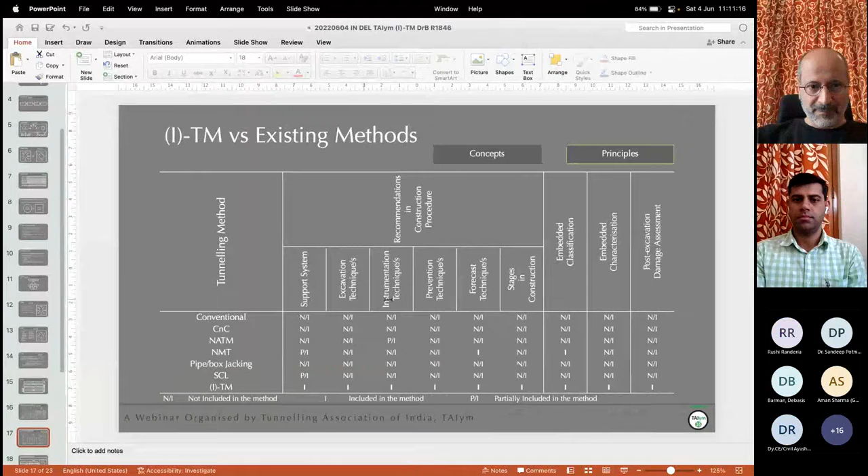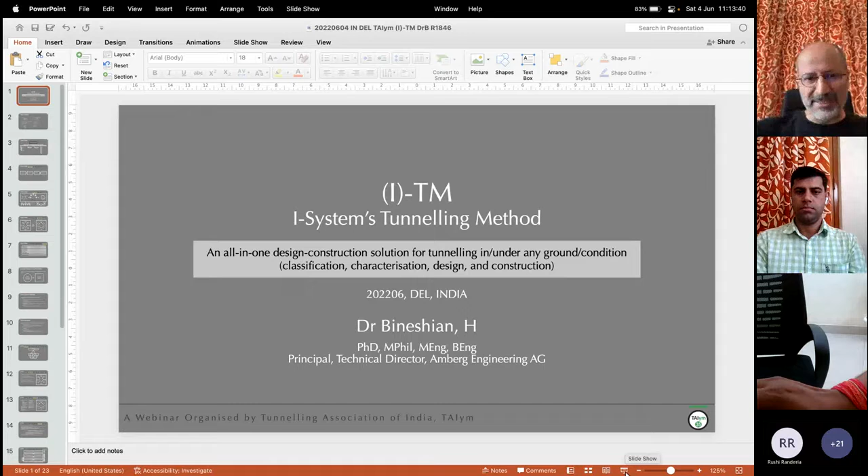This lecture is about I-TM, I-Systems tunneling method, an all-in-one design construction solution for tunneling in or under any ground or condition. A tunneling method which includes classification, characterization, design approach, and construction advices. Today's lecture contains the tunnel design, including the design approach, I-System, I-TM, and design procedure.

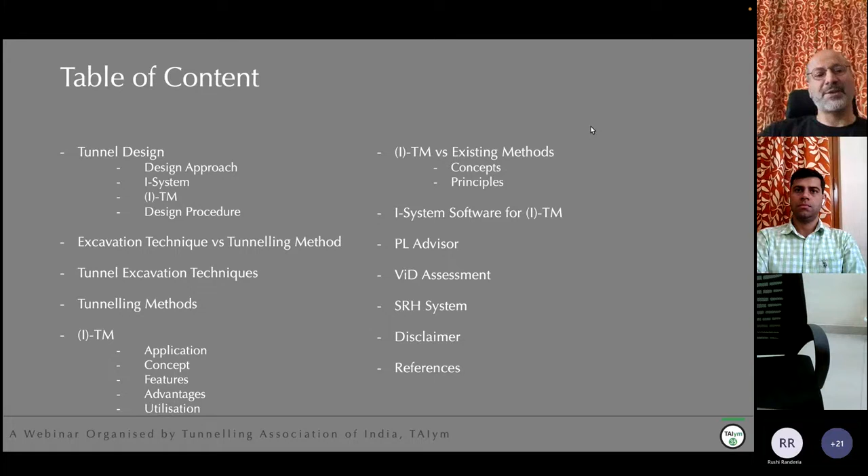Today also I will compare the excavation techniques with the tunneling methods to highlight more the difference between these two, which unfortunately are used interchangeably by mistake by tunnelers. I will go into details for the tunnel excavation techniques as well as the tunneling methods. Then I will enter the discussion about the ITM. I will explain the application of ITM, concept behind the ITM, features of ITM, advantages of ITM, and utilization of ITM.

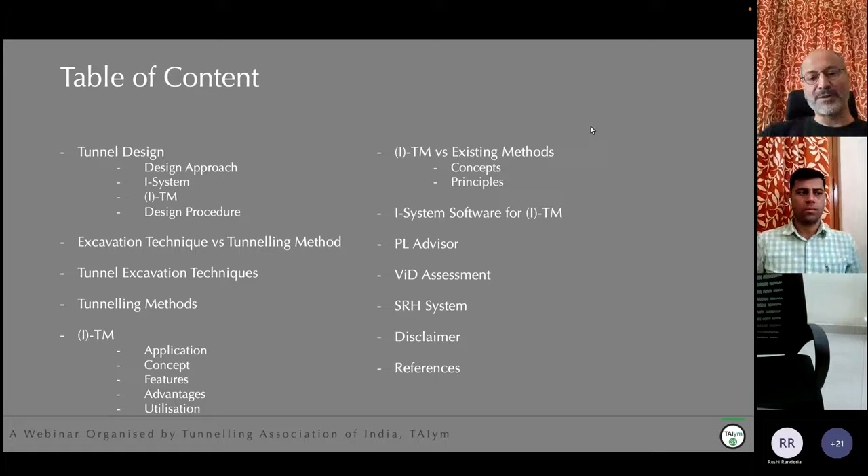ITM will be compared with the existing tunneling methods, considering the concepts and the principles. I will explain very little about the iSystems software that can be used in ITM. Also, I will have a brief explanation about the pull length advisor, vibration-induced damage assessment, the stress release hole system, and finally the disclaimer and references.

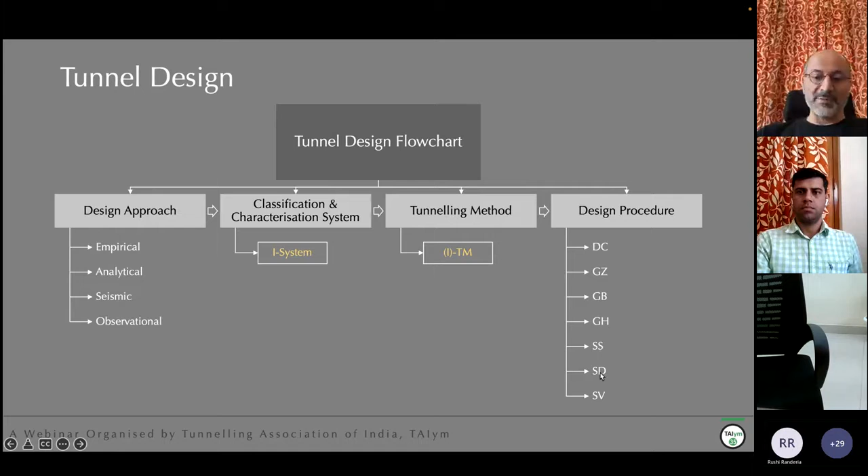Another most important part of the tunnel design flowchart is the classification and characterization system, where in this case we will be using only iSystem. Then is the tunneling method, where we are focusing on ITM. And finally the design procedure, including the data collection, ground zoning, ground behavior, diagnosis of the ground hazards, determination of the support systems, structural dimensioning, and finally structural verification.

Let's go a little bit more into the details. Design approach in tunnel design. It includes 4 steps. Empirical part, which is the design practicality, usually defined by the classification system. Analytical part, which is the design core, where we do the structural dimensioning as well as the structural verification. Seismic part, which is the dynamic design part for the design of the tunnel.

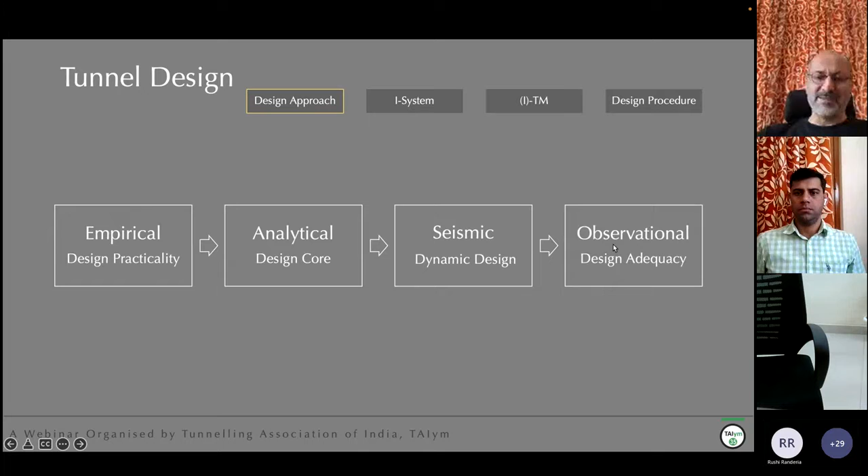It is very important also to consider the seismic effect in our structure. And finally, the observational part, which is the design adequacy. It is design as you go during the construction.

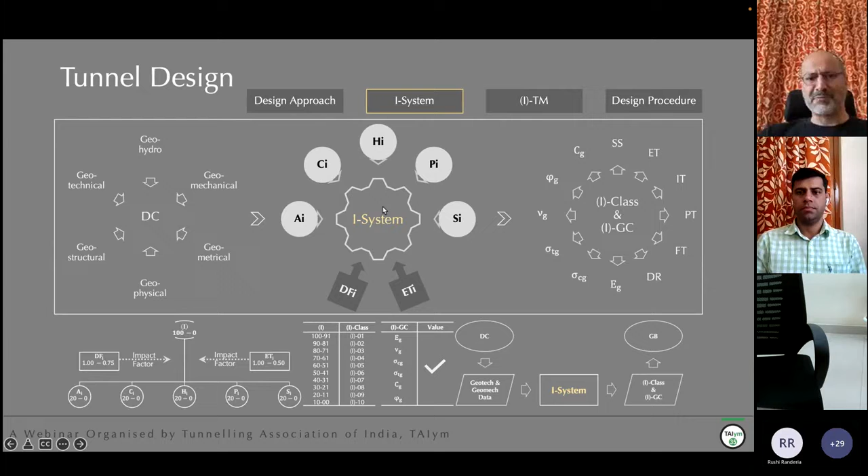In the tunnel design, the second part was the iSystem. What is iSystem? Today's lecture is about ITM, and ITM is the tunneling method of iSystem. But let me just briefly explain in one slide what is iSystem. Then if there was interest on that, in another webinar, I can present the iSystem comprehensively.

iSystem has an engine including 5 indices and 2 impact factors. To be able to run this engine, we need to do the data collection first, DC, including the geohydrological data, geomechanical data, geometrical data, geophysical data, geostructural data, and geotechnical data. All of this information is obtained from the face of the tunnel; in this case, we are talking about iSystem for tunneling. iSystem is applicable for any underground spaces, semi-underground spaces, as well as the surface structures. But here, I'm focusing on underground parts.

So when data collection is done, it would be entered to this system, and then these 5 indices, including the armature index, configuration index, hydro index, properties index, and strength index will be calculated. As you see, each of the indices has a 20% share out of 100. The score is between 0 to 20. When it is calculated, two impact factors, one is the dynamic force impact, another one is the excavation technique impact, will be impacting the total value gained from the summation of these 5 scores. And finally, I, which is the I system value, will be calculated, which is between 0 to 100.

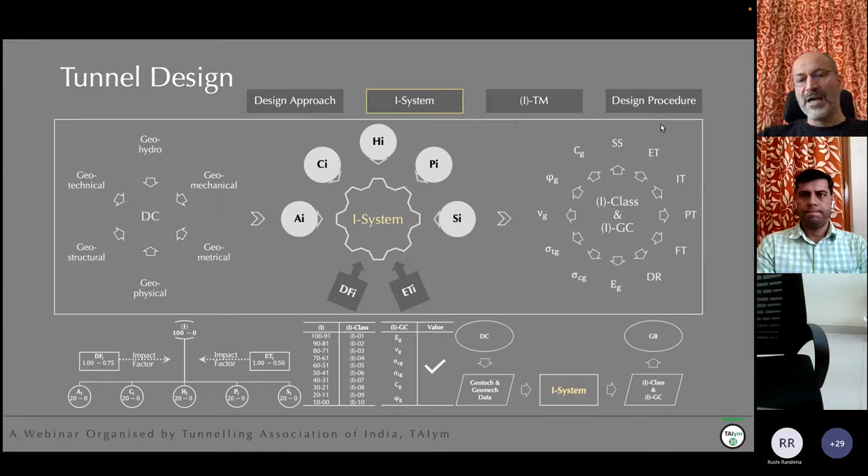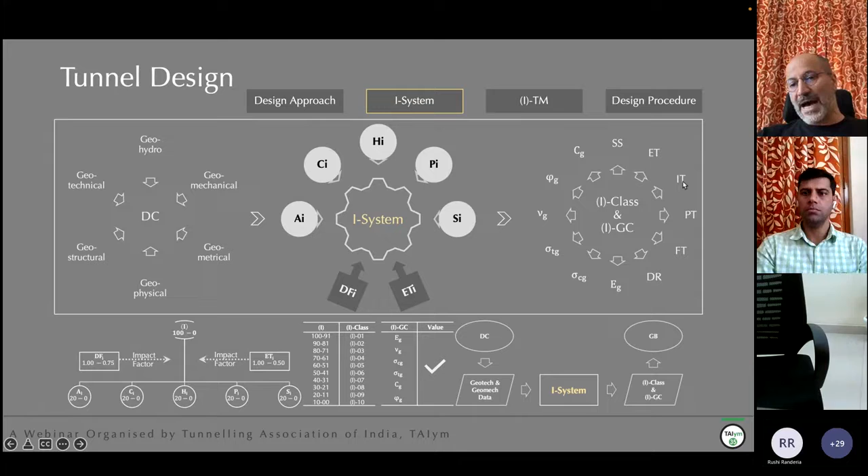Then IT, which is the instrumentation technique, it would be giving you advice how to monitor your underground space. Next one is the PT, which is the prevention technique. It would assist you how to prevent collapses and failures or incidents in your tunnel. Then FT, which is the forecast technique. It would be giving you advice on how to predict the ground ahead of your face. We can't drive in the tunnel with lights switched off. We need to predict the ground and move ahead in the tunneling. And the last recommendation from the I class as output of I system is the design remarks. It would tell you what should be your philosophy to design this tunnel.

Another part of output of I system is the IGC. IGC is the I system's ground characterization. It also includes 6 outputs that are shown here. Modulus of deformation of ground, unconfined compressive strength of ground, uniaxial tensile strength of ground, Poisson's ratio of ground, internal friction angle of ground, and cohesion of ground. These parameters are also the output of I system as I system's ground characterization. With these parameters, you would be able to design the structure or review your design.

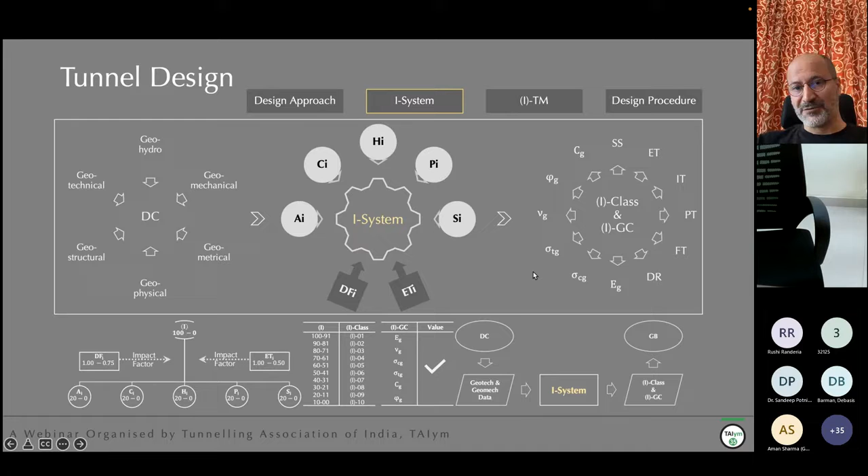Now, based on this I class and IGC that we obtained, as you remember, we collected the data, DC, which included the geotechnical and geomechanical data. Then we entered it in the I system engine and we calculated the I system. Output was I class and IGC. Based on these 12 parameters, you would be able to predict the ground behavior, as an additional feature to all of those parameters that are given to you as output of I system.

Now, let's get back to ITM. ITM is the I system's tunneling method. In a simple word, ITM is the underground part of I system. So it is called ITM. It has very important assumptions that are mentioned here, and very important principles that I would explain when I enter particularly into the ITM discussion.

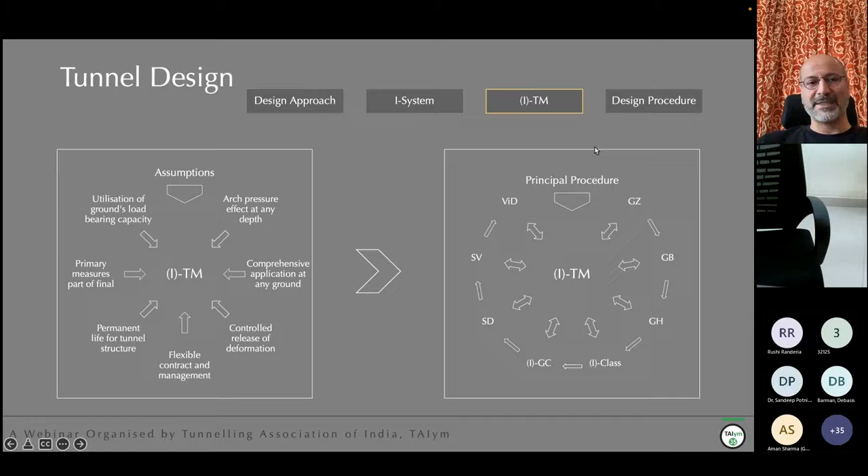Finally, in the tunnel design, we enter the design procedure. Design procedure includes 7 stages. Again, DC, which was the first step, which is already done because you were going to calculate the I system. DC is the data collection. It is the required data for I system and design.

Next stage is the GZ, which is the ground zoning. If we have 3 kilometers, 10 kilometers, X kilometers of tunnel that we are going to design, we need to divide this entire length into particular zones with similar properties and design the tunnel for those particular zones. For example, if finally we divided a 12 kilometer tunnel into 6 zones, we need to give 6 designs. This means that each zone would have its own design. It is a function of ground properties. The I system will assist you to do the GZ also.

Then is the ground behavior. In the previous slide, I said how it can be derived from the I system. It is based on the mechanical responses between the ground and the structure you want to make. In this case, the structure is the tunnel. It can be an underground station. It can be a semi-surface structure.

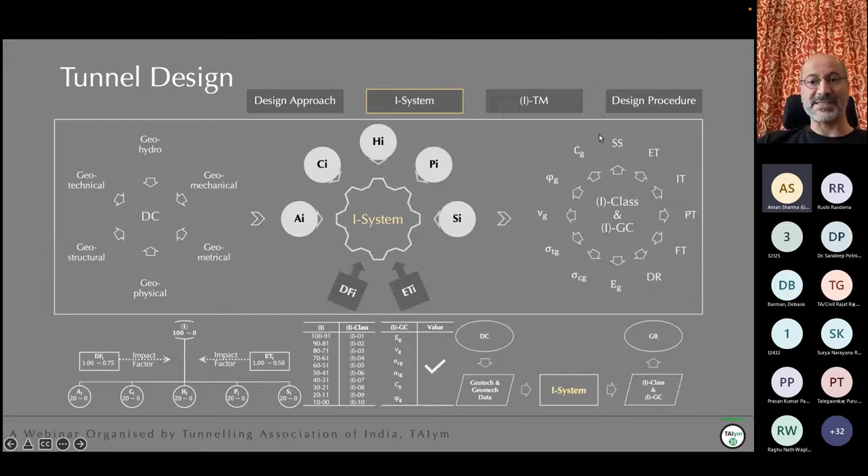Next stage after ground hazard diagnosis is the support system determination. Again, it would be determined by the I system. The I system, as I explained here, would tell you which type of support system you need to go ahead with. So the support system would be defined and determined by the I system. It is based on the I system for each ground behavior and associated ground hazard.

The next one is the structural dimensioning. It would be done partially by the I system and partially by analytical methods to dimension the structure. It is the design analytical calculation. And finally, you need to verify your design, which is the SV, structural verification: relative safety margin definition for each individual structural dimensioning that you have already done.

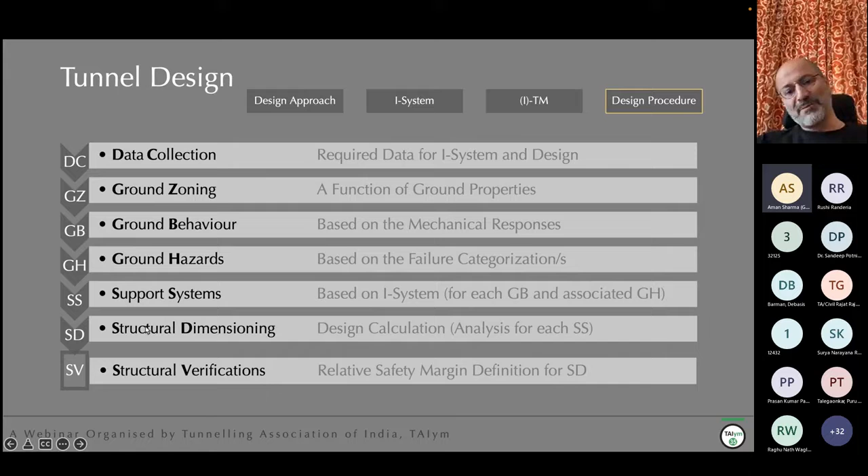Now let's go a little bit further into tunneling. You may interchangeably use excavation technique and tunneling methods, and you see experts also sometimes using them interchangeably, but it is not right. Tunnel excavation techniques are employed in tunneling methods as an important element. It's not the tunneling method. It is one important element of tunneling methods. So my request to all of you attending this session is to please differentiate between tunnel excavation techniques and tunneling methods.

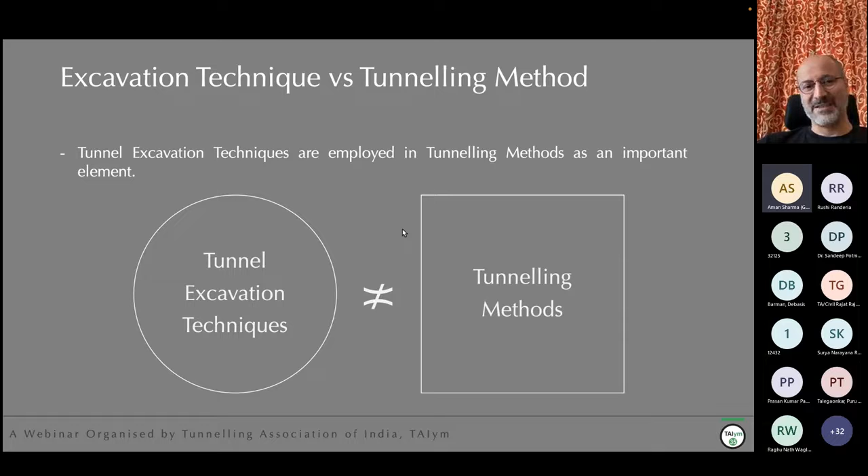The reason I am emphasizing this is that it would lead to misunderstanding of tunneling, misunderstanding of ground behavior, and the result would be huge mistakes during construction or before construction in the design and pre-design phases. So let's go into the details of tunnel excavation techniques. Then you yourself will get the differences. Techniques are employed in tunneling methods for excavation purposes only. It is only and only for excavation. But different types of excavation methods can be utilized in different tunneling methods.

Number one of the tunnel excavation techniques is manual, or MAN. It is applicable for small to large scale excavations without use of explosives. Examples are partial sequential digging, partial sequential excavation.

May I request the microphone to be switched off?

So for the manual techniques of excavation: partial sequential digging technique, partial sequential excavation technique, sequential excavation methods. It is an American method. Unfortunately, many people call it a tunneling method. It's not a tunneling method. It is only a sequential excavation method, usually used for full face excavations. The manual excavation techniques can be used for heading and benching or for full face excavation.

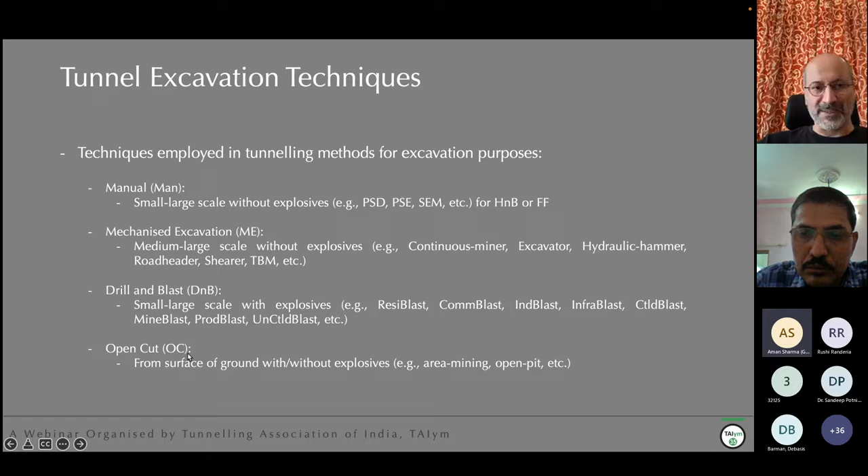Now let's explain the tunneling methods: methods employed in design, construction, and maintenance of underground spaces. Three important words are used in the definition of tunneling method: design, construction, and maintenance. You may raise a question in your mind: why maintenance? Why design? Usually you have heard about tunneling methods for construction. But from now, put this question in your mind, and I hope that you will get the answer at the end of this lecture.

So, tunneling methods are the methods employed in design, construction, and maintenance of underground spaces, including the tunnels. Two types of categorizations I can present here for tunneling methods. One, medium-based, another one, concept-based. Medium-based tunneling methods are based on the medium in which

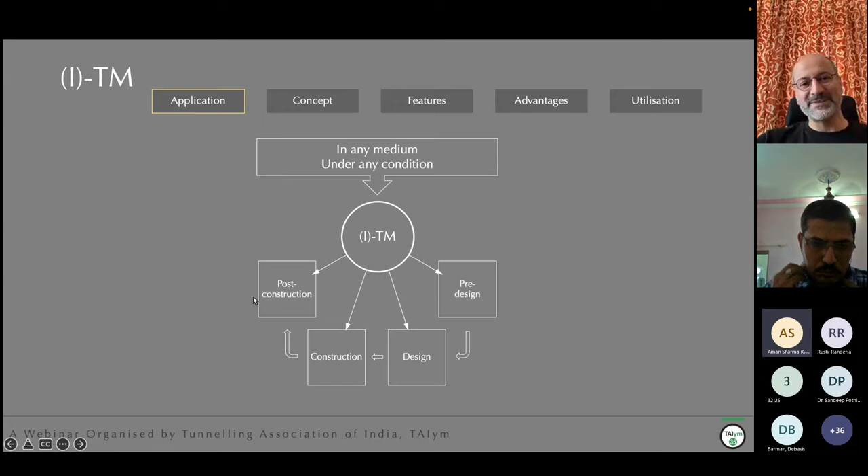So now you know the difference between the tunneling methods. Maybe you knew that before, but I tried here to clarify the difference between the tunneling method and excavation technique. Now is the time to go a little bit further into the details of I-TM.

For your information, if you have more interest in I-TM, there is a published paper which is available. I can provide it to the organizer. It is about I-TM, and you can go into the details of I-TM there. I will try to give the most important information on I-TM in this lecture.

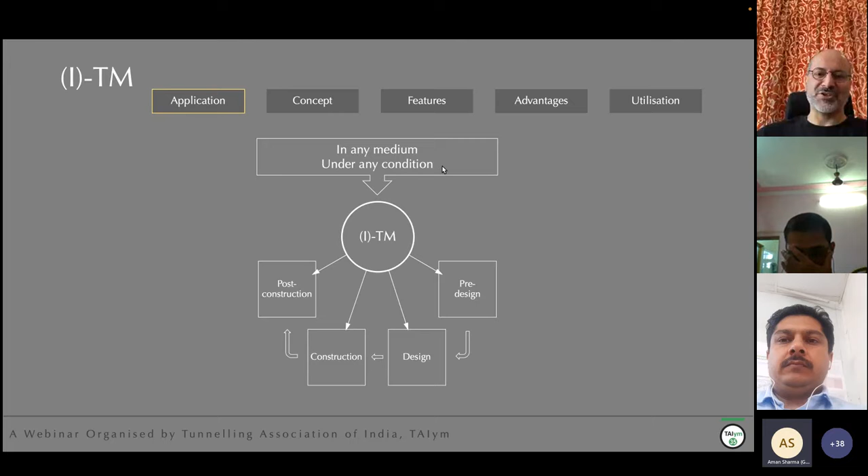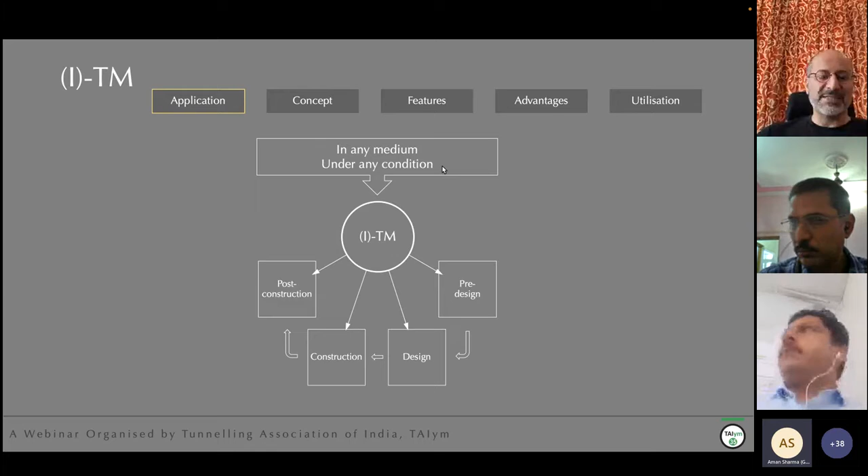Let's see what is the application of I-TM. It is designed to be applicable in any medium, meaning rock, soil, underwater. And it is designed to be applicable under any condition, any special condition of ground.

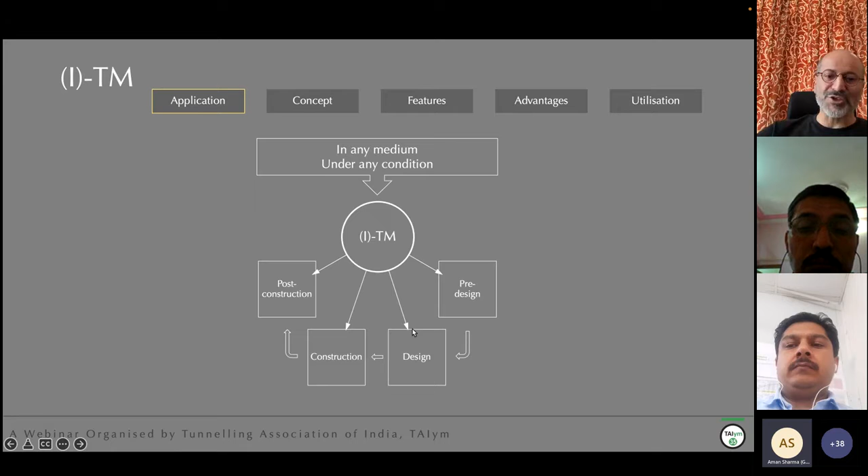So this is I-TM, and it can be used in pre-design phase, design phase, construction phase, post-construction phase, and maintenance. It considers all three aspects: design, construction, and maintenance.

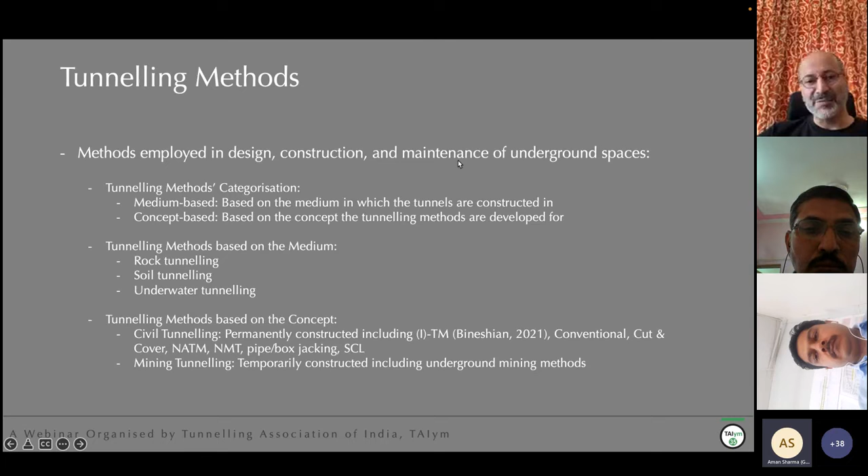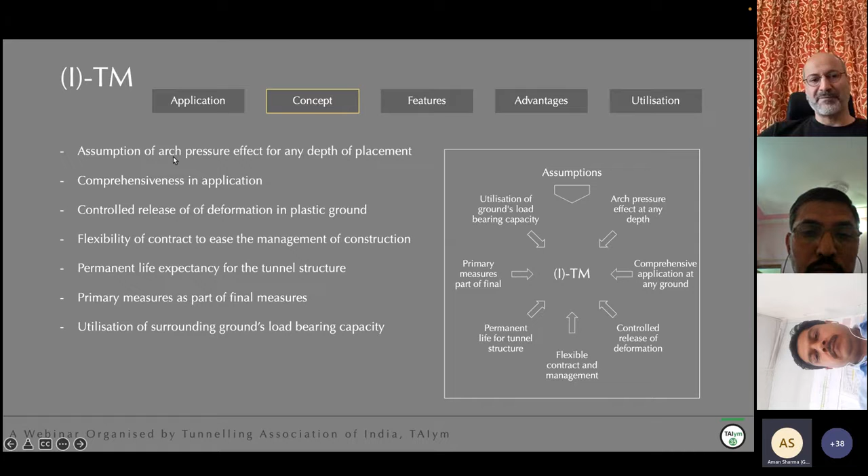What is the I-TM concept based on? It has some assumptions that I would explain one by one. In I-TM, arch pressure effects at any depth of placement of the tunnel will be considered importantly.

We are not neglecting the depth, and we are not neglecting the arch effects. So you are not required, when using I-TM, to classify the tunnel based on depth into shallow and deep. Based on any depth, arch pressure is considered.

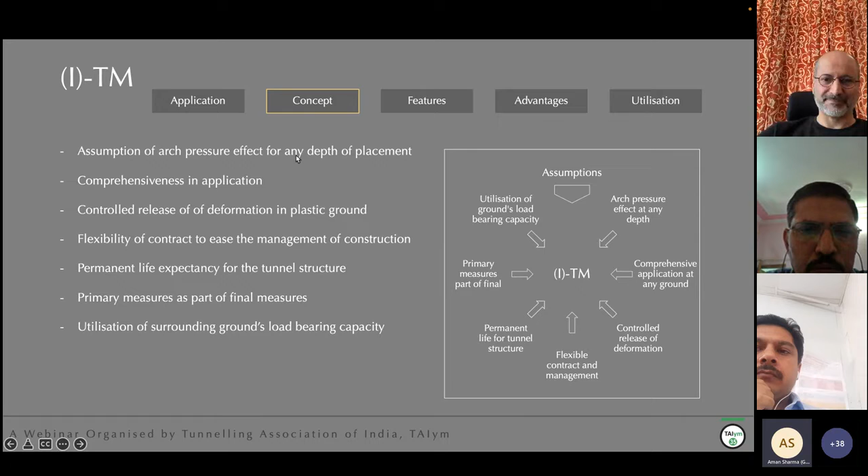Another assumption or concept is that it is comprehensively applicable in any medium, in any condition, under any condition.

The next concept is that it would allow the structure of the tunnel to release the stresses, to release the deformation, in a controlled manner in plastic condition.

It gives you flexibility of contract to ease the management of construction. I have worked in four continents, and I have observed the challenges involved in tunneling methods. Unfortunately, in any of the existing methods, sometimes your hand as designer is tied, because it is not included in the BOQ, in the contract.

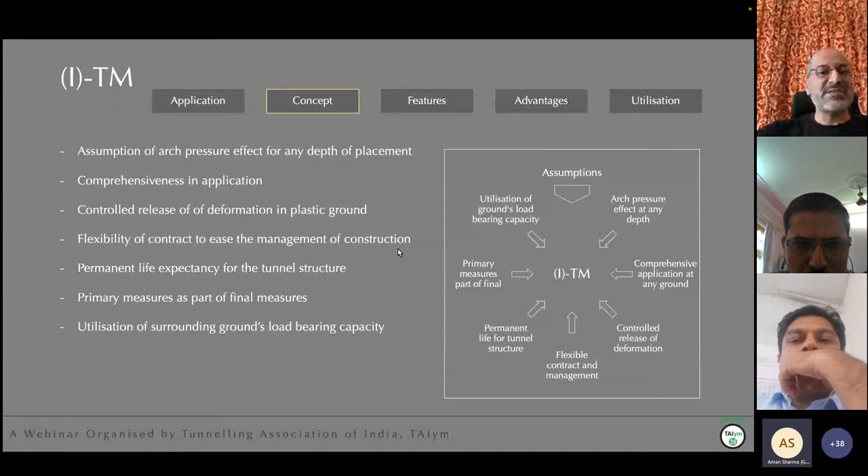ITM resolves this by giving you a comprehensive range in the contract, so that flexibility of contract would be given to the clients. So you, as the geologist, as the engineer, as the tunneler, as the designer of the tunnel, would not be facing such issues.

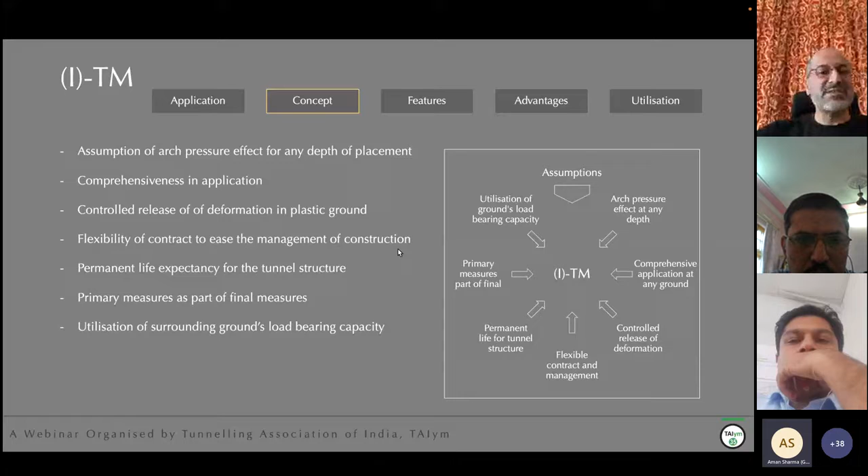Another important concept in ITM is life expectancy of the structure. It is based on permanent life expectancy for the tunnel structure.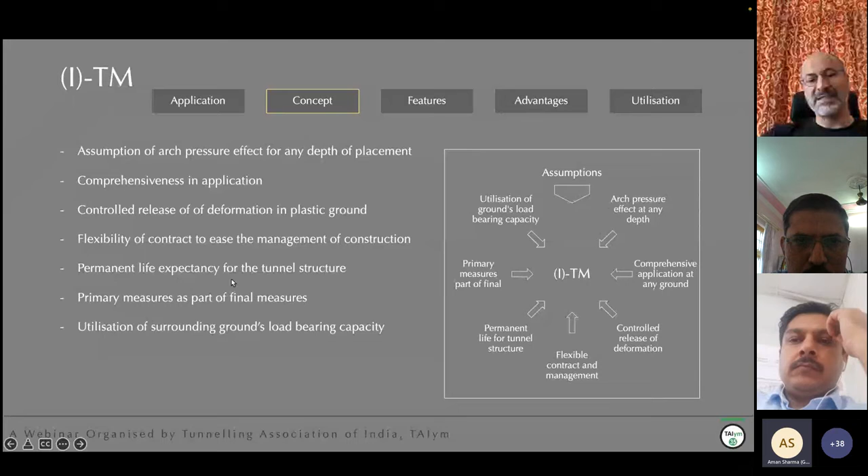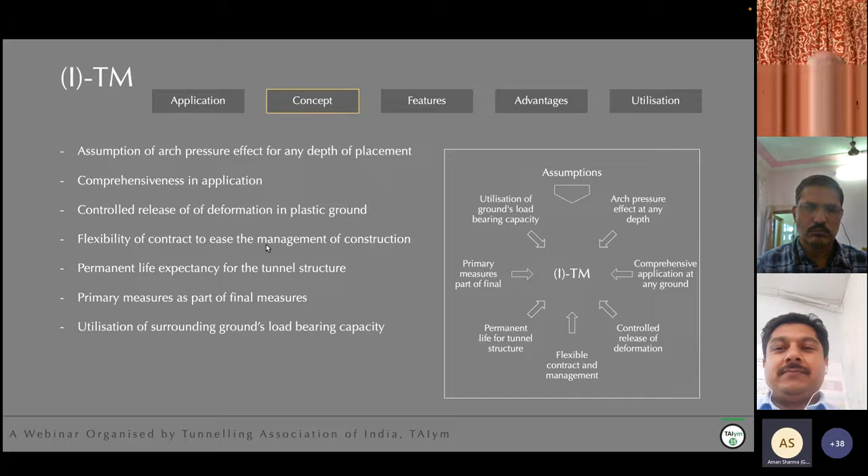ITM is developed to save in cost and time as well. You are not required anymore to neglect the primary measures in your design for final measures. It means that primary measures are part of final measures in ITM.

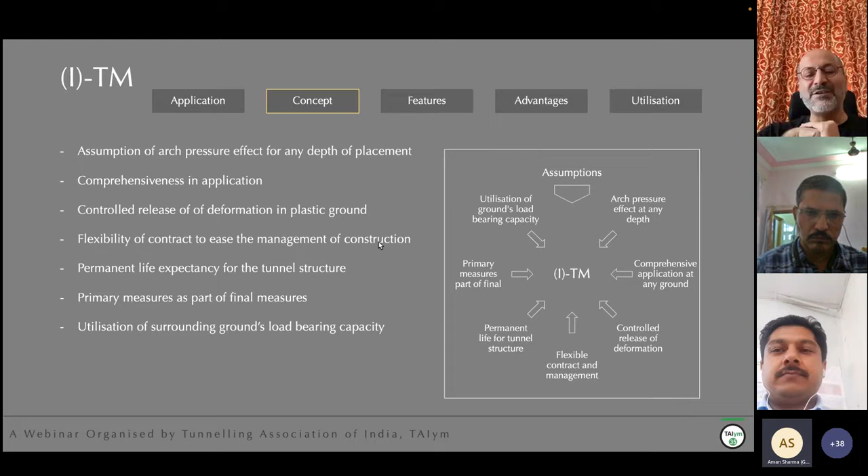And the last concept is the utilization of the surrounding ground's load-bearing capacity. It utilizes the load-bearing capacity of ground, because ground is better than any structure you put manually to take the load. It gives you the active and activation concept of stresses in the surrounding ground.

It tells you to design the structure in a way that the ground itself cooperates in load bearing. Give a measure to improve the load-bearing capacity of ground. Don't design passive structures.

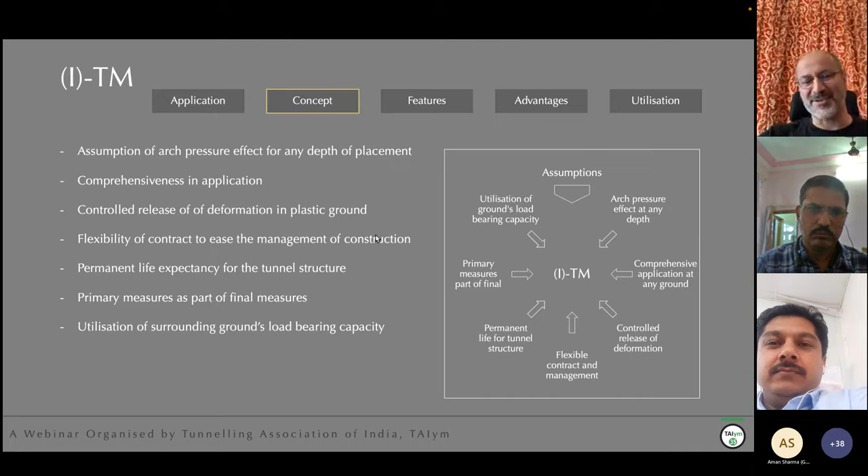What are the features of ITM? I have listed it and demonstrated on the right-hand side. Use of I-system in the design procedure. When you are using ITM, it has embedded classification in it, very simple. It would assist you in derivation of I-class, which is the I-systems classification.

Derivation of IGC, which is I-systems ground characterization, gives you the most important mechanical properties of ground for analytical calculations. It helps you determine the ground zoning in your design, identifying ground behavior, and diagnosing the ground hazard associated with each ground behavior. It determines the support system for you, assists in structural dimensioning, and helps you in structural verification.

Another feature of ITM is the employment of I-system in construction for pre-excavation evaluation, applying I-class and IGC. Another feature is the employment of post-excavation damage assessment tools.

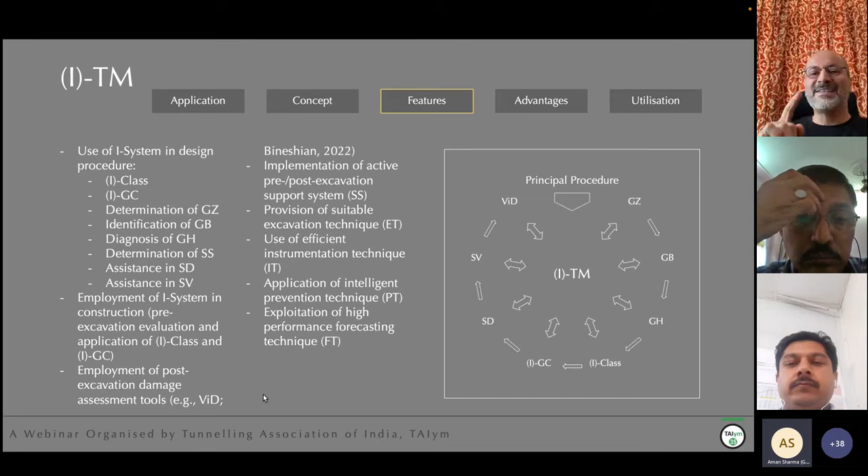ITM gives you the opportunity to assess the damages you are applying to the underground structure during the excavation. It is called vibration-induced damage. The related paper is also available.

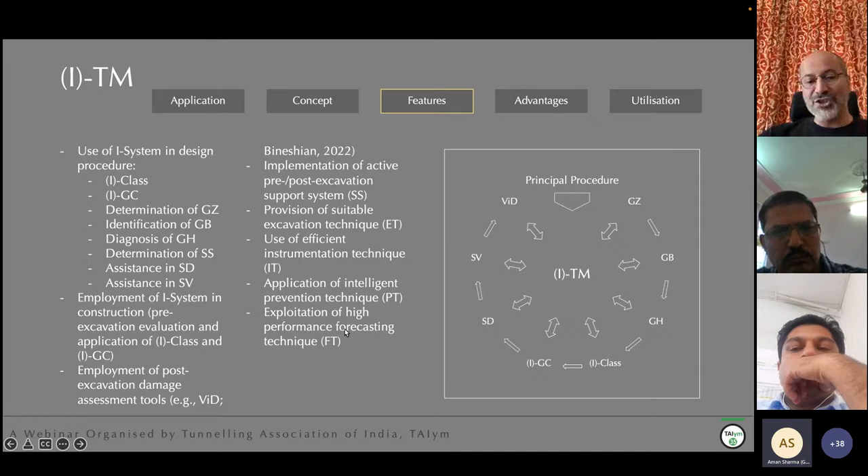Another feature of ITM is implementation of active pre- or post-excavation support system, provision of suitable excavation techniques, use of efficient instrumentation techniques, application of intelligent prevention technique against any failure or collapses or surprising incidents, and exploitation of high performance forecasting techniques, to have insight into what is going on ahead of your faces in your tunnels.

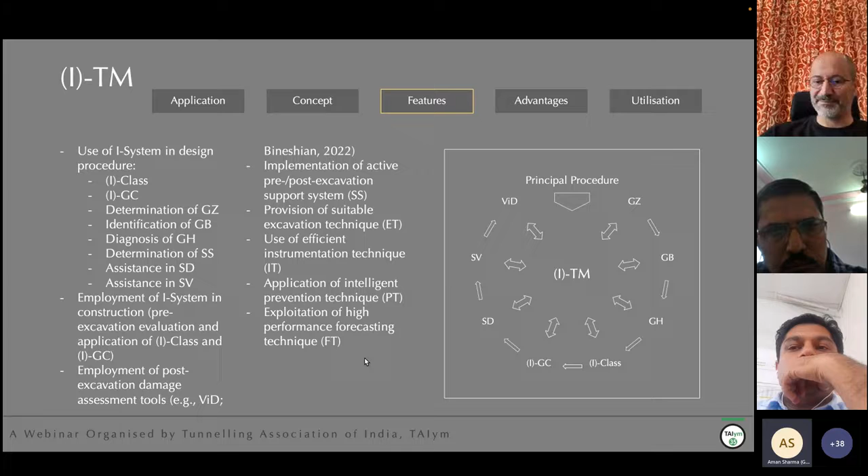What is the advantage of ITM? When I was explaining about the application, the concept, and the features of ITM, most probably you have already got the advantages. I would like here to summarize them.

Applicability in any media, rock, soil, underwater. Feasibility and practicality under any ground condition, covering varieties of ground behavior and hazards, safety and optimality in design and construction, cost efficiency, consideration of the primary measures as part of final measures, uniformity in utilization, embedded classification and characterization system of I-system, I-class, IGC, provision for pre-excavation evaluation, embedded I-system and GCD.

GCD is ground conductivity designation.

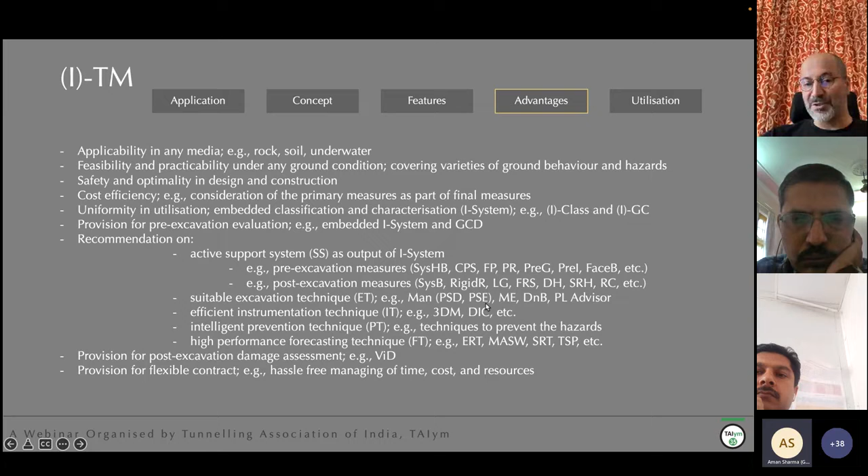Suitable excavation technique, ET, including manual, PSD or PSE, partial sequential digging or partial sequential excavation, mechanized excavation, drill and blast, pull length calculation, and efficient instrumentation technique, IT, including 3D monitoring, digital image correlation, or other techniques as proposed by I-system.

Intelligent prevention technique, PT, for example, techniques to prevent the hazards. High performance forecasting techniques, including electrical resistivity tomography,

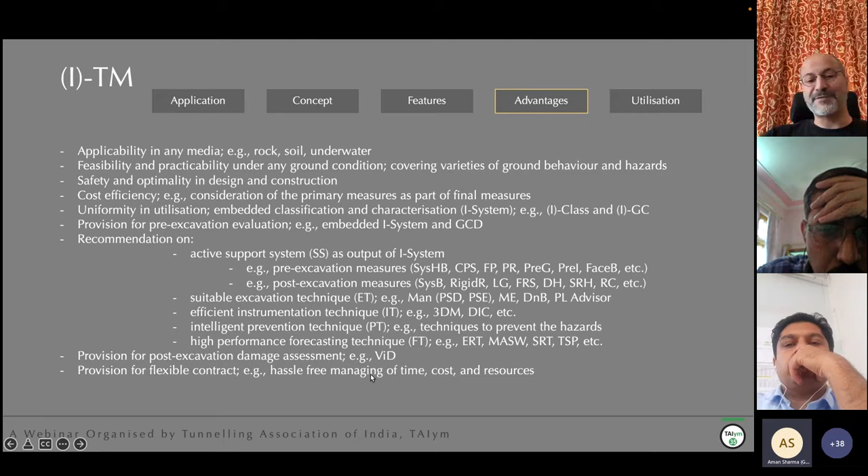ERT, MASW or multi-channel analysis of surface waves, SRT which is the seismic refraction tomography, and TSP, which is the tunnel seismic prediction, provision for post-excavation damage assessment VID, and provision for flexible contract, hassle-free managing of time, cost, and resources.

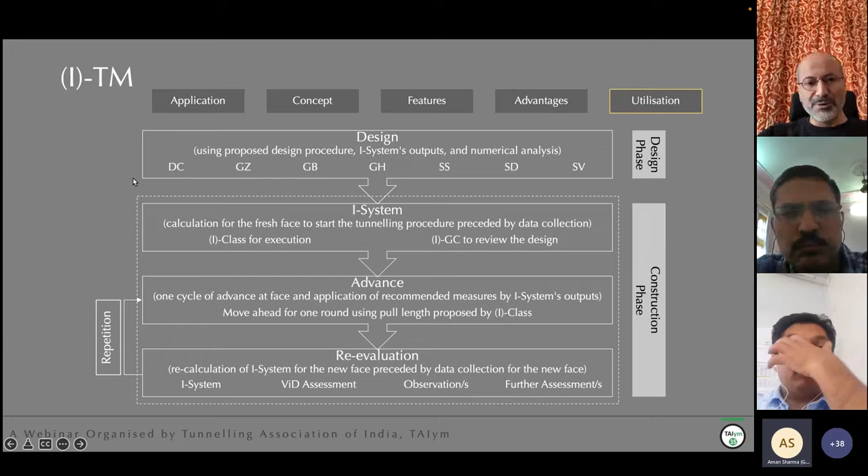How to utilize it? How to utilize ITM? I tried to explain it in this slide for design phase as well as the construction phase.

In the design phase, you will be doing the data collection, putting it in the I system, making the ground zoning, deriving the ground behavior, identifying the ground hazards, determining the SS, and helping in SD. All of these stages from DC to SD is by I system, and then it helps in structural verification.

This is the use of ITM in the design phase. And now, how to use it in construction phase. I know this question was in your mind, how to use it. Now we have designed the tunnel. How to go ahead? Simple.

You just calculate the I system for the fresh face. Even at the portal, when you want to start the tunnel, you just calculate the I system. It will give you the I class and the IGC. Based on the I class, recommendations are given for the support system, the excavation technique, the instrumentation technique, for prevention of failure, and for forecasting. Advance, start the excavation. Advance, advance your tunnel.

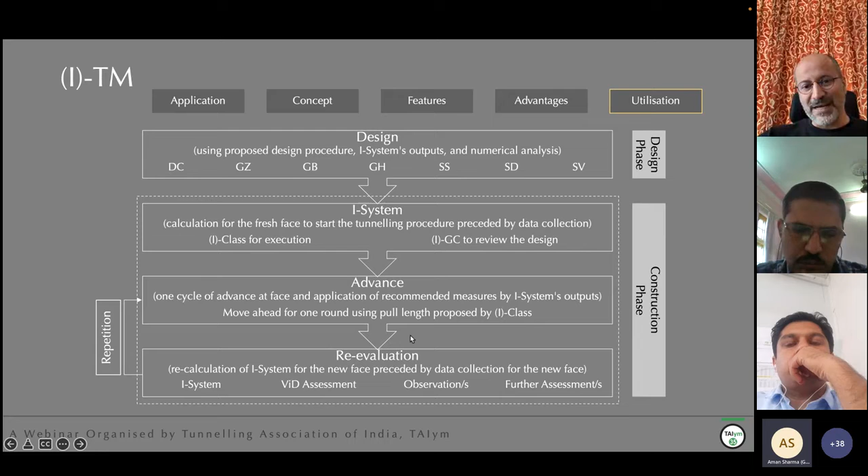And based on the IGC, review your design. That means, for example, advance the tunnel for 3 meters, now you reevaluate it, reevaluate your ground condition, again using I system. Now, as you have done the blasting, or employed any excavation method, you also calculate the VID, assess how much damage you have applied, check your observations, and finally do your judgment.

Repeat this procedure: advance, apply I system, advance, apply I system, and go ahead until your tunnel is broken through.

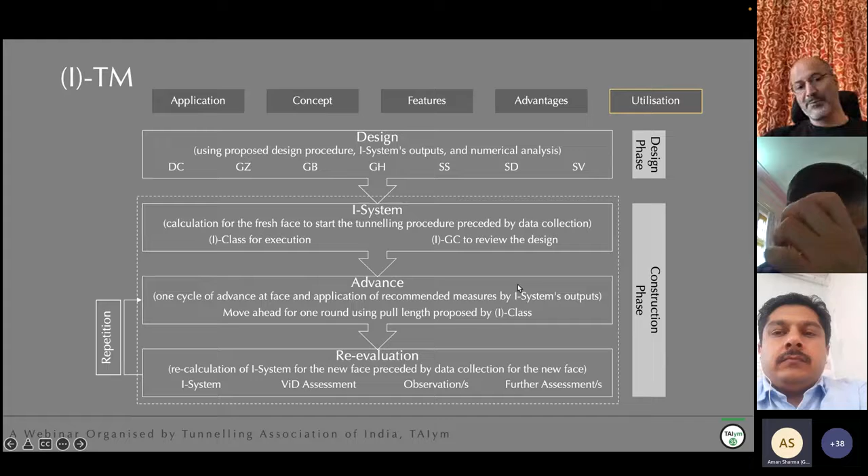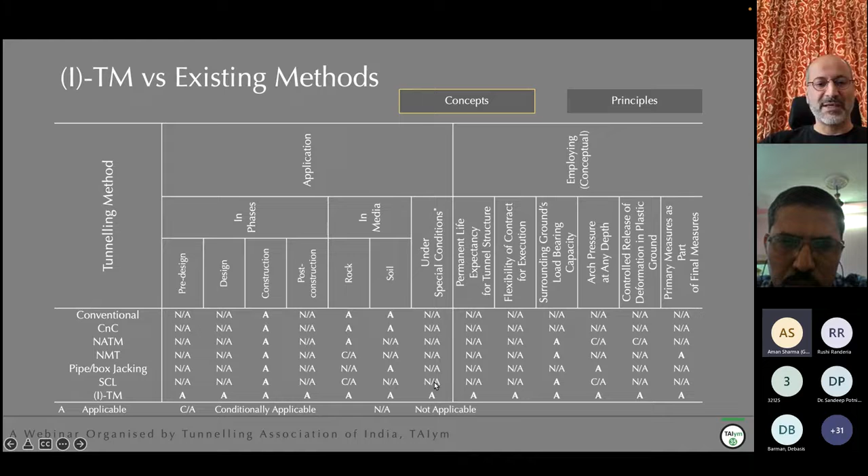Under special conditions, none of them consider the special condition, including viscoelastoplastic ground, rock burst, plastic ground, fully plastic ground, time-dependent ground, coal burst, or whatever. ITM is applicable.

For employing permanent life expectancy for tunnel structure, almost you can't find this concept in the development of any of them. The same for flexibility of the contract, you can't find it.

For the surrounding ground's load bearing capacity consideration, NATM and NMT as well as SCL are considering it. However, ITM is fully considering it.

Arch pressure effect: NATM conditionally applicable, pipe or box jacking is applicable, SCL conditionally applicable, and ITM is fully applicable.

Controlled release of deformation in plastic ground: NATM conditionally applicable, ITM is applicable, others not applicable.

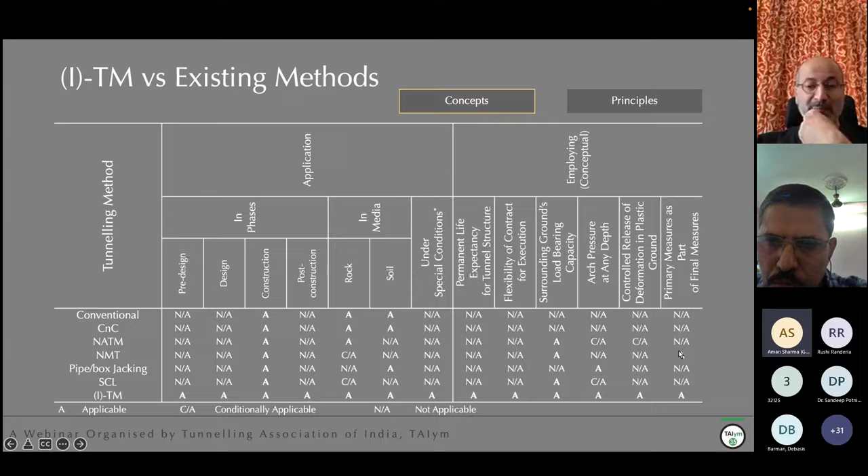Primary measures as part of final measures: only NMT and ITM applicable. The rest of them are not applicable.

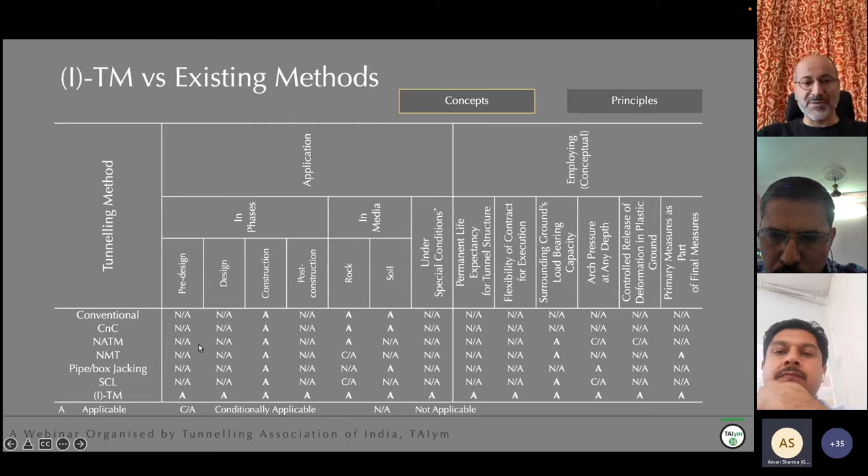So you see, based on the concept these tunneling methods are developed, most of them are lagging behind and they are not comprehensive enough. What about the principles?

The principles I have considered for the comparison are the recommendations in construction procedure, including support system, excavation technique, instrumentation technique, prevention technique, forecast technique, and stages in construction.

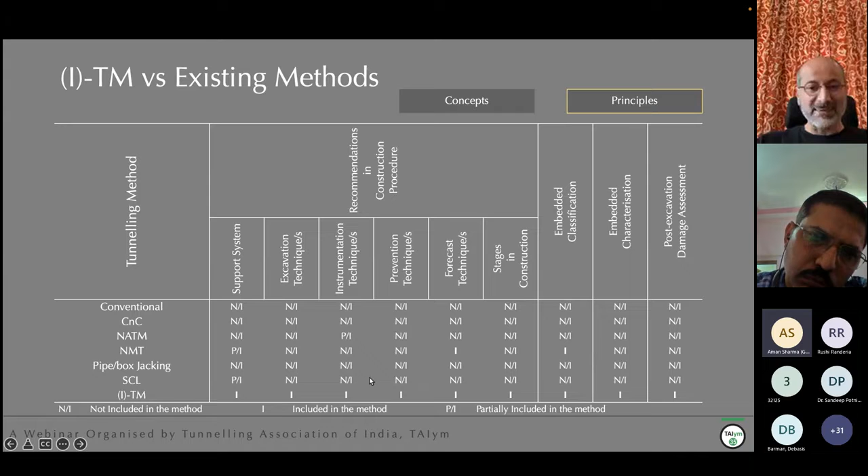Almost none of them included these principal parts, except in some special cases. For example, NATM partly included instrumentation technique, or NMT only included forecast technique.

But the rest, you see, very rarely propose support measures, excavation technique, or comprehensive instrumentation and prevention techniques. However, ITM is providing all of these concepts, all of these principles.

For the embedded classification, except NMT and ITM, none of them have embedded classification.

For embedded characterization, none of them give you characterization for the ground, meaning none give you the mechanical properties of ground. ITM will give you that. And for post-excavation damage assessment, none of them give you this assessment. ITM is giving you that.

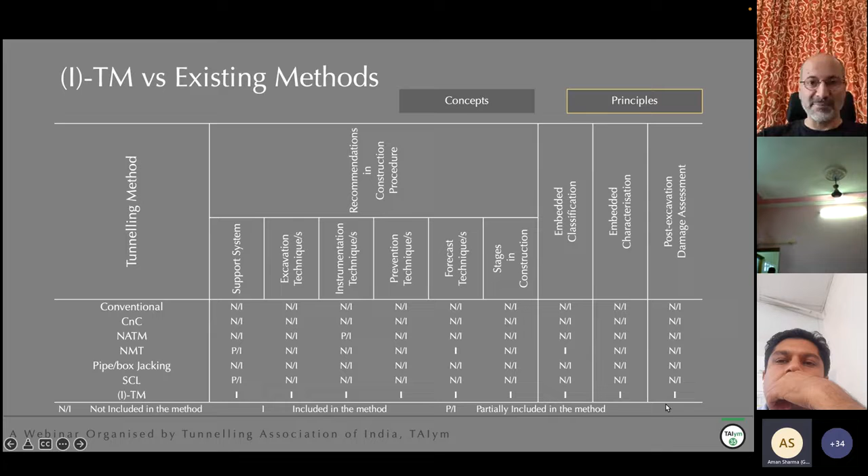Let's see how we can ease the use of ITM. It's simple.

A UK company, in joint venture with a Norwegian company, developed the iSystem software. I should clarify here: iSystem is developed by myself, but the iSystem software is developed by a Norwegian-UK company. And this software is quite simple.

In 4 minutes, you can enter all of your input data and you will get valuable outputs. The use of iSystem software is shown in this flowchart, easy.

Select the type of structure, including underground for tunneling or underground spaces, caverns, stations, whatever, or semi-surface structures or surface structures. Enter the input data, compute the iSystem, and it would give you the I-class and IGC.

Beside I-class and IGC listed here, it would give you all of these outputs. It would give you the I-class, which gives you the support system, excavation technique, instrumentation technique, prevention technique, forecast technique, and design remarks. It will give you the IGC, which is the mechanical properties of ground for design and reviewing of the design.

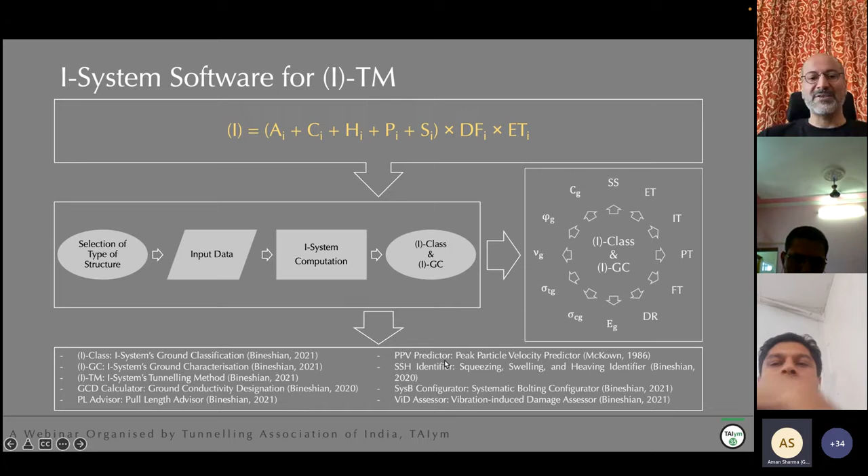Peak particle velocity predictor is a problem for all engineers, especially in India. I see that peak particle velocity is neglected, and tunneling is going on in most projects I have seen without measuring peak particle velocity. In this software, in a very simple calculation, it will give you the peak particle velocity value, and you can know what you are doing with your blasting, how much damage you are applying.

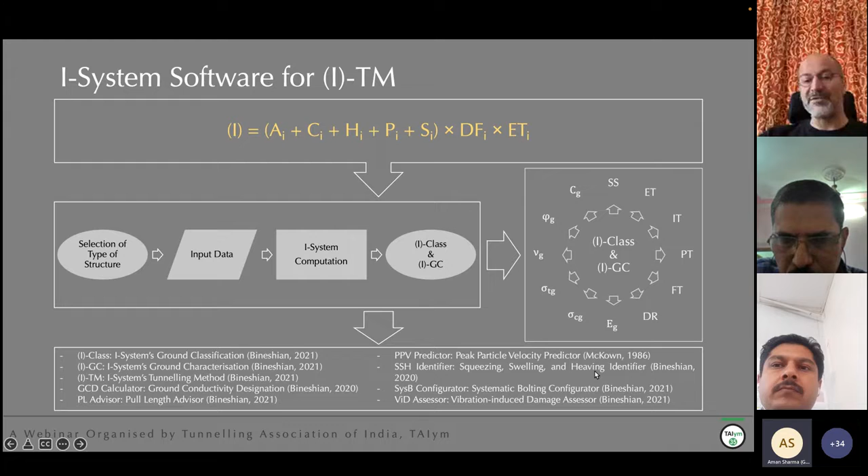If you are driving in SSH ground, which is squeezing, swelling, and heaving condition, there is one identifier calculator in this software which gives you the chance to identify whether the ground is squeezing, swelling, and heaving ground or not. And based on that, you can get the advice from the I-system output.

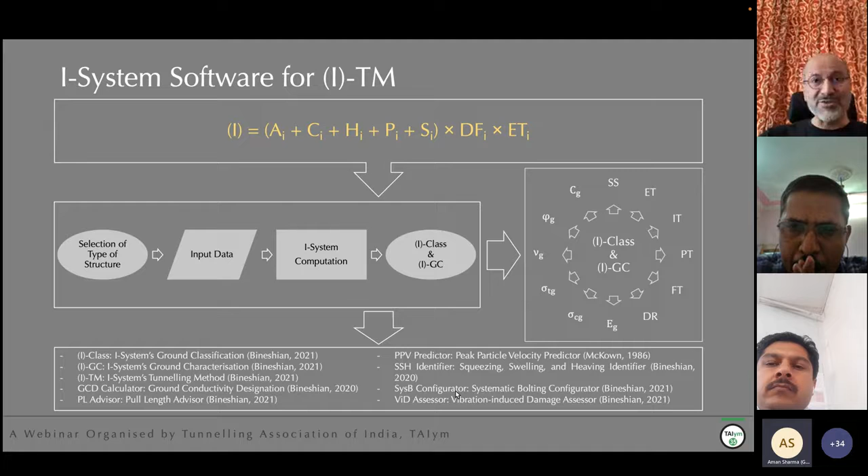It also gives you a systematic bolting calculator, meaning that you can calculate and configure your systematic bolting in the I-system. And finally, the vibration-induced damage assessor, another calculator that gives you 5 methods of assessment of the damage you are applying during the excavation in your I-TM tunneling method.

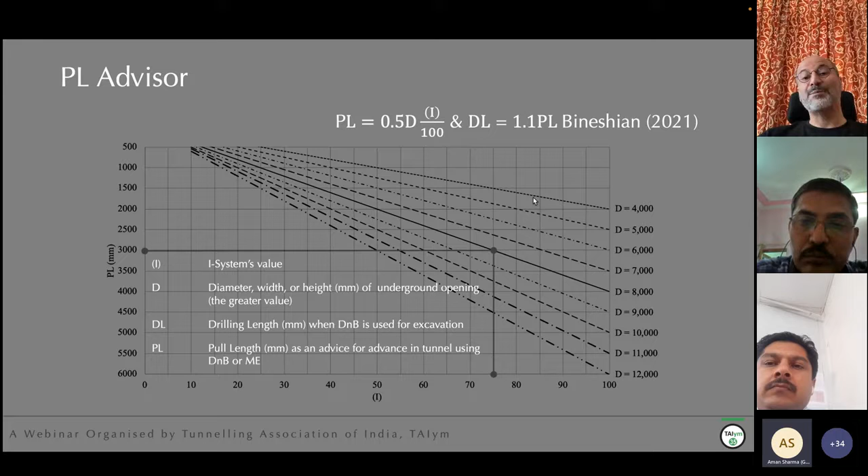I have provided this example here as PL Advisor, which was developed in 2021. The PL Advisor in the I-system software gives you a very quick calculation of your safe pull length if you are driving with drill and blast.

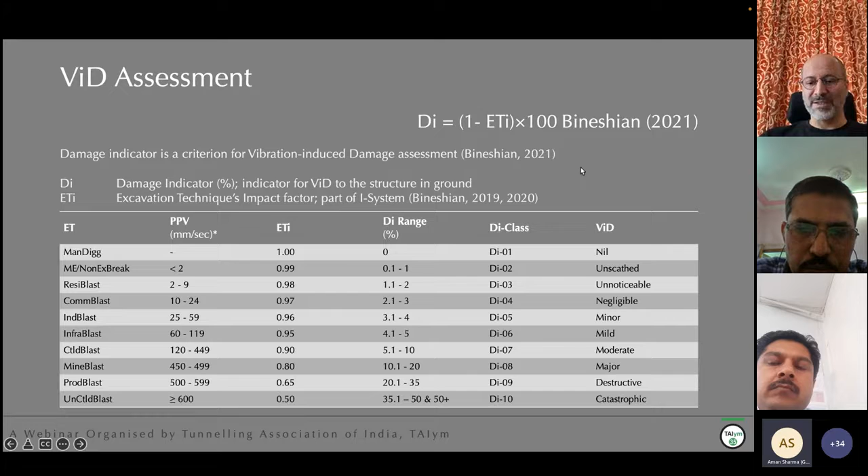This is another example of vibration-induced damage assessment, which is the damage indicator where you can use the I-system again here or PPV to classify your damage from unscathed, unnoticeable, negligible, minor, mild, moderate, major, destructive, or catastrophic. And so you will get the notice and you will issue it to the contractor to be careful and not to damage the ground, not to deteriorate the surrounding ground.

This is the SRH system. The related papers are also available. The same concept is used in the I-system software as the identifier and the criterion that can identify SSH ground from non-SSH ground. And it also gives you the solution if your ground is SSH, meaning squeezing, swelling, or heaving, how to treat it.

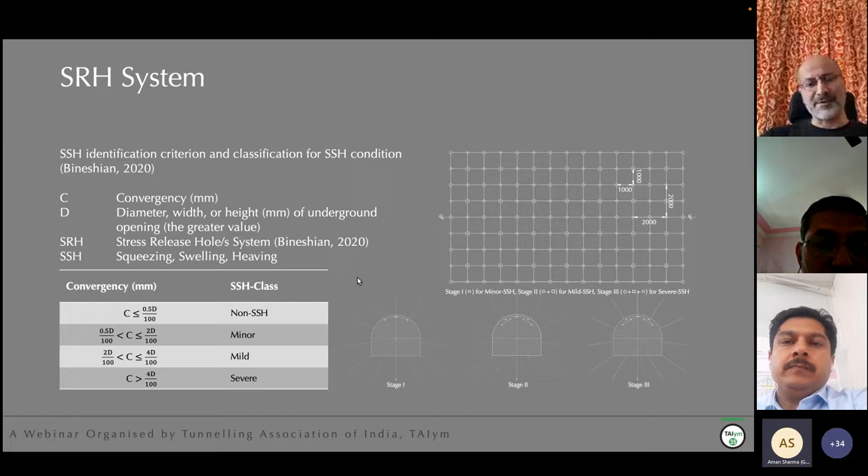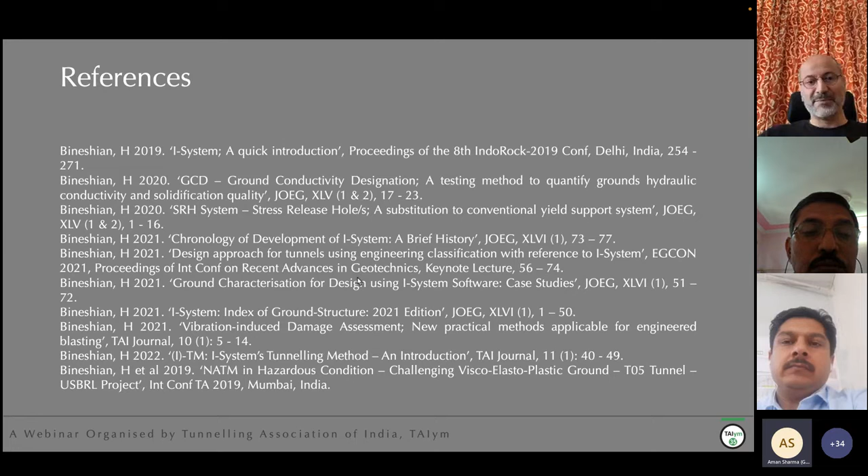I would like to answer your questions if you have any question on I-TM. I know one big question in your mind is about the I-system, what it is, how it works, how it can be calculated. It can be presented in another lecture; this lecture would not allow me to present the I-system. So if you have any question, please don't hesitate to ask.